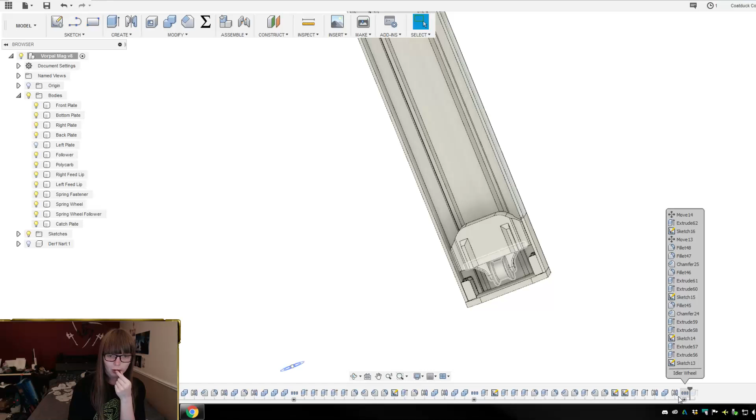Basically, I printed off the idler wheel holding, and another pusher. And for some reason that I honestly don't know if I could explain to you, despite having identical G-code, the follower didn't work. It just printed wrong, and I couldn't tell you why. Again, I didn't change anything, it was even the same G-code, the same file on the unchanged, the exact same file that printed the follower that's in the working one, which is now sent off. It didn't work for this one.

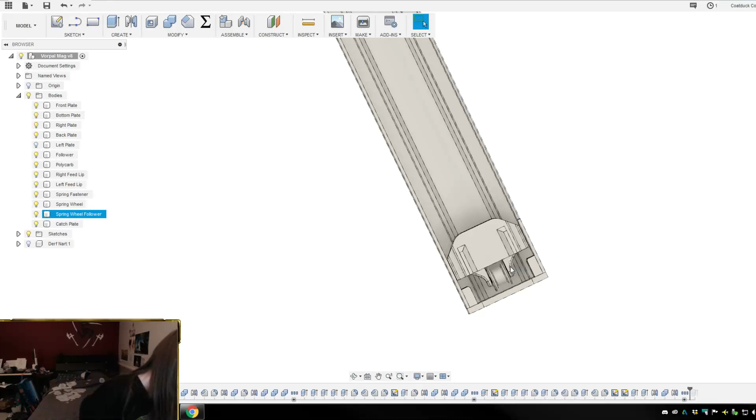Now, I don't know where the part has gone, but it did break. But this bit right here, I think I called that the spring wheel follower, which doesn't want to isolate for some reason. My computer is not happy.

When you make the mags open source, I'm going to print off so many of them. Good, good, that's the point.

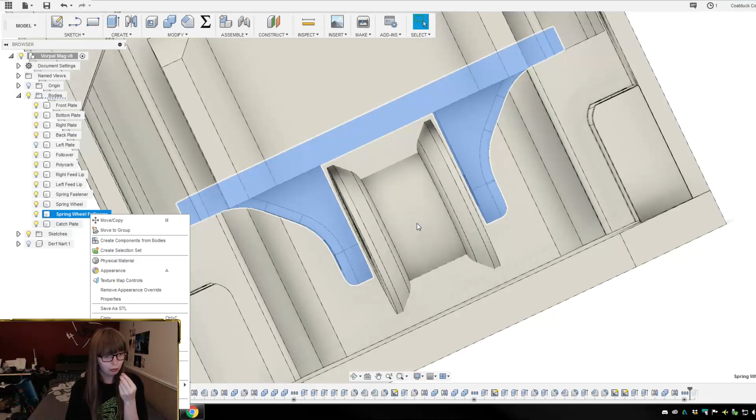Wow, this is really just not having it. There we go. So this bit, it printed off like trash, and I think I might have put it in the trash, I can't find it now. And it's because these are too tall and too thin. It's funny now - they printed off to about here, fine, and then when they got taller, they kind of fucked up.

Oh, I thought you meant same as in being trash. Yeah, there's tons of adapters out there.

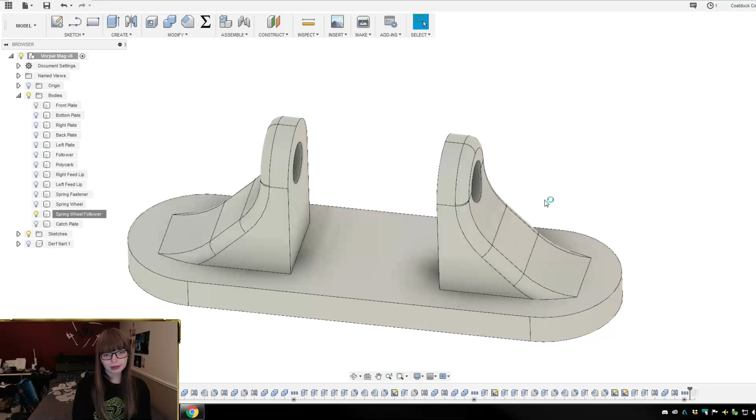So, I'm actually excited to see if and when Worker releases their version of these half-length mags. I am, however, a little concerned because the reason I wanted to do this was because I knew Worker was going to do this - I mean, it didn't take a genius to figure out that Worker was going to make their own version eventually.

But the reason I wanted to do this was so that if the community made their version and it was the same as Jet's version, then it would tell Worker what we wanted, right? Like, it would tell Worker, hey, we want this, we want compatibility and cross-compatibility between platforms so that we can have one ecosystem, not you pick Worker or you pick Jet, right?

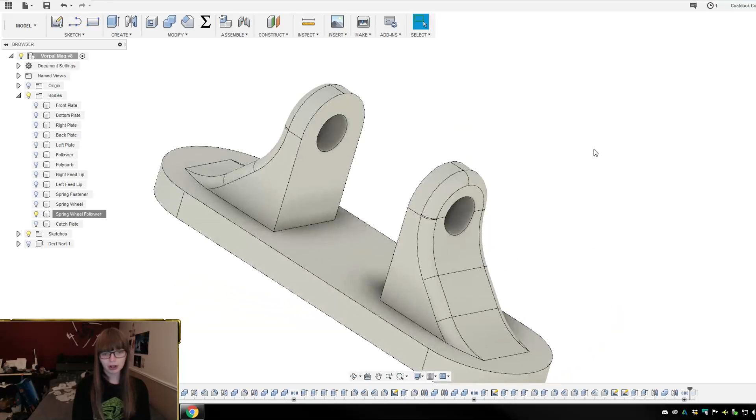No, that's not true, both of those statements are not true. Worker is working on a version of Katana's or half-length mags. And katanas do not have a patent on them. Katanas do not qualify for any patents - there's nothing about a katana that is patent-worthy. And if there was anything about a katana that was patent-worthy, it would already be patented by Hasbro, which would mean that they couldn't have done it.

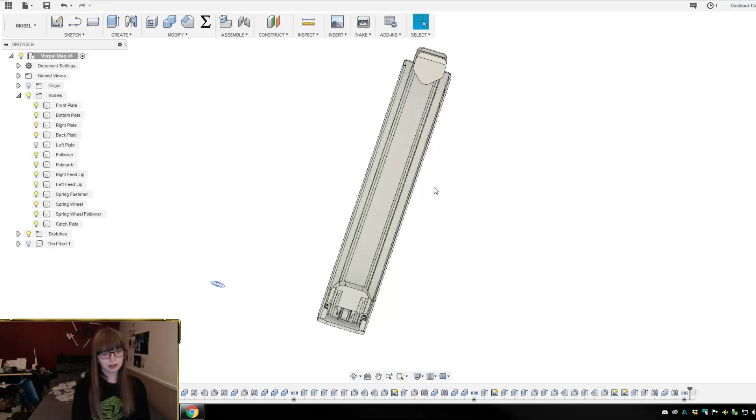So here, let me unisolate. Sorry, I'm just focusing on one piece right now. So this - it's got the side missing right now, but this is a half-length magazine that is compatible with katanas, and going to be open source as soon as I can get a system where this idler wheel actually is idle.

Because I've had issues with - I don't know if you can see that, you should be able to. So here is the idler wheel mounted in with the spring attached. I'm having a bitch of a time showing you guys, but there it is.

So as it is right now, it does actually work. Straight up, right now, I could glue this together and it would work, but it doesn't work very well - it kind of does that. And now, part of that is just the fact that this print didn't go right, which is fine, because we can reprint that, it's not a big problem.

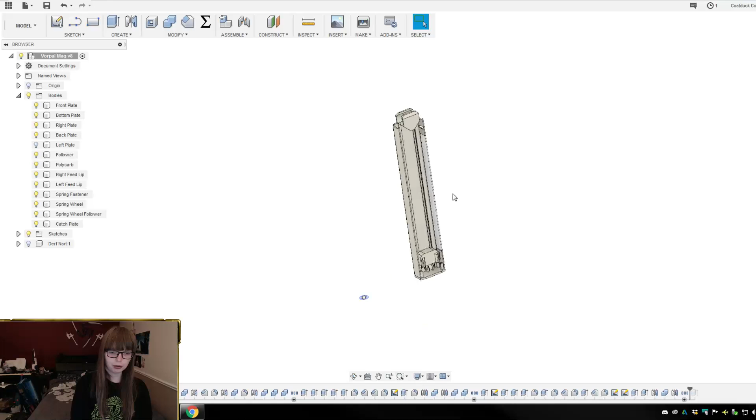But the other thing is, it's literally just this surface here grinding on this, and we can essentially create a bearing surface by using a nail through here. So if you trim down a nail and then shove it through a follower piece like this, then it actually works really well. I haven't tested it with a nail specifically - I'm going to be looking into finishing nails, like nails that are nice and shiny and smooth, and I'll find exactly what nails work best and then design it for that.

But for the time being, I had a - okay, well, we're going to use an Allen key because it's science. So this is not actually perfectly smooth, but it's already a marked improvement - like it's... oh, I fucked it. You gotta run it parallel, which is fine, because the constraints of the mag will ensure that happens, but when I'm running it like an idiot, it doesn't.

But, yeah, there we go. So, even on a hexagonal surface of the Allen key, it's still running really smooth. So that's what we're looking for.

So I have to redesign this bottom follower piece so that it runs smoothly.

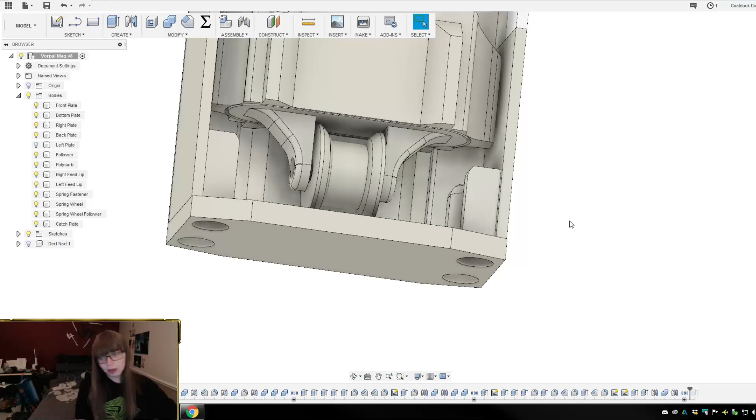Now the other thing is, this piece here, this side panel, which is not gonna be visible to anybody.

So let's take off the front plate and we can see this better. Actually, we can just isolate this section.

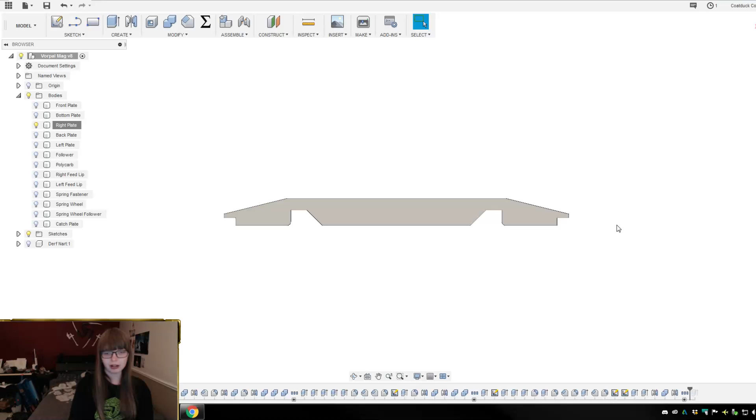The profile, this is the wrong way around, but let's spin it. So the profile here is like this, and it's printed with this bottom section being on the bed. And now I was always concerned about how this was going to turn out, because I think this is 0.5 mil thick in that area, which is really thin, all things considered.

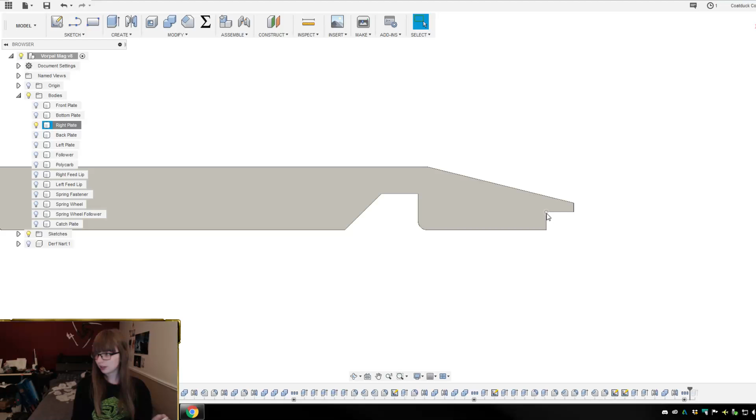I wondered if my new printers could handle it. With this project, I wanted to test my printers, not necessarily design things so that they're difficult to print, but have the early versions be basically testing what my new printers could do. And while they can do this, they can't do it reliably, which is the important part here.

So at some point, which might be now actually, we are going to add a manually generated support here. Actually, we can do it right now. It doesn't really matter.

Oh, actually, that's the wrong one. I don't know why I keep doing that lately. Okay, why does it do that?

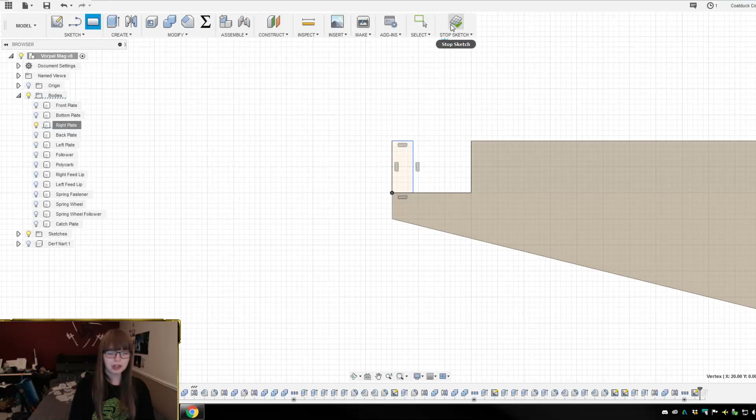I just don't know. Okay, so that's 1 millimeter tall, and we want it 0.4 millimeters thick, because we would want it just 1 layer thick. Let's just manually type in 0.4.

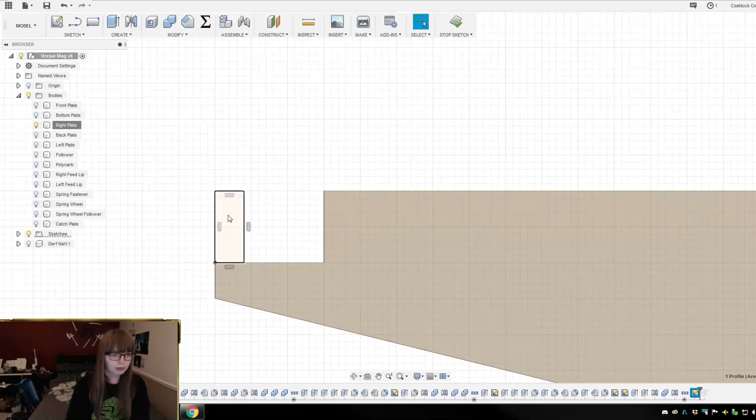Now we have to figure out how long this magazine is. Holy shit. Okay, so the length of this magazine is not as straightforward as it may seem, because it's based on a set of parameters. So we have to figure out...

So this is a 15 dart magazine. So we want to extrude this. Okay, so how long is this to start with?

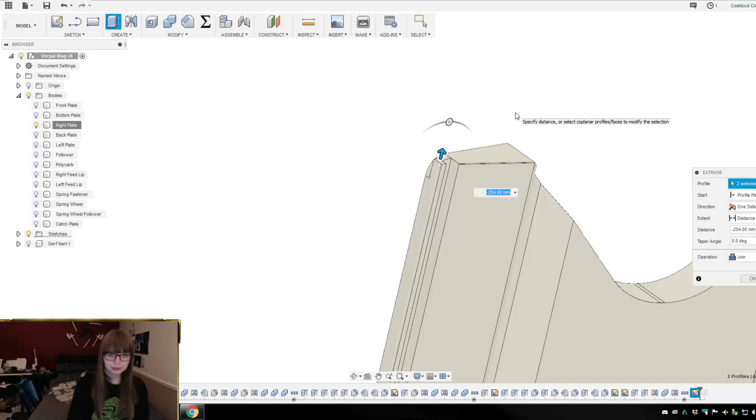Oh, hello, got a new computer. It's not true, I need to upgrade this computer.

So we could just leave it here, but then the problem is as soon as we edit these parameters, it's gonna fuck up, I think. Actually, it might not, because I selected that instead of... let's just double check. I'm pretty convinced it's gonna screw up, but let's give it a shot just in case.

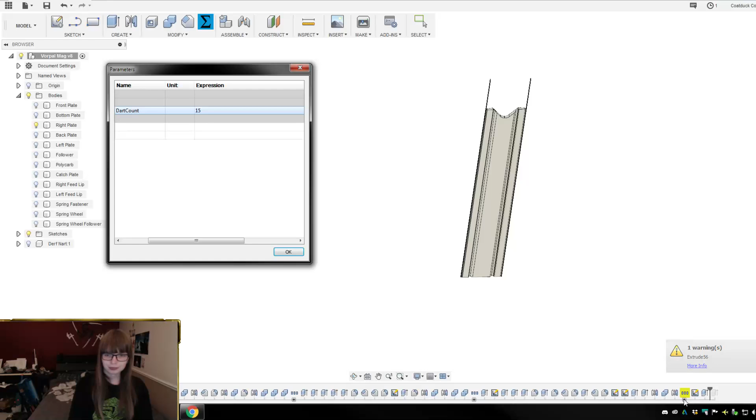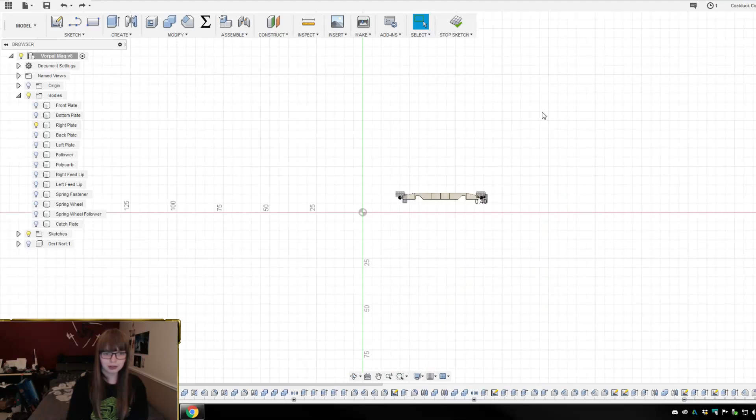Oh yeah, I'm confused as to what happened here, but we're gonna burn that bridge when we come to it. So let's Control-Z out of that, and then we're gonna get rid of that as well.

So yeah, we have to figure out the total length from the bottom to the top. And actually, I think the front plate, if we bring this back in, I think if I look at this... no, I've got no fucking idea.

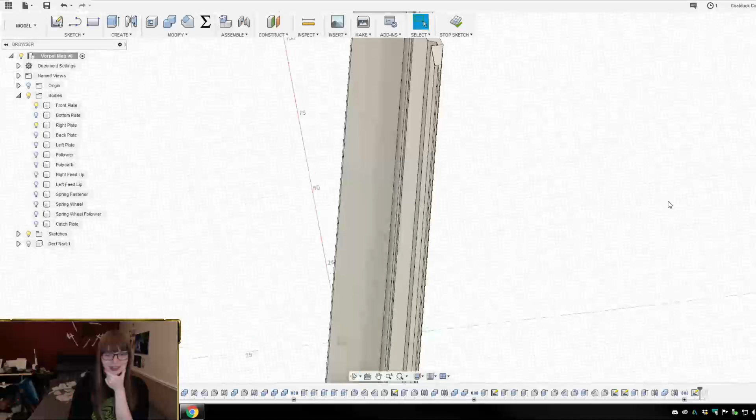Catherine, don't say shit like that. He might. I want to say I'm kidding. I don't know if I am, I think I'm kidding. Panda, we all love and appreciate you, a whole lot.

Okay, so let's figure this out.

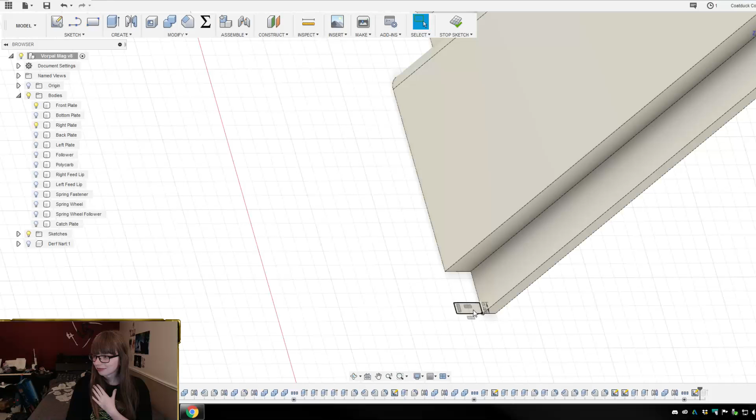Hey, Mustachio, Pistachio. I wouldn't either. God, no, God, of course I wouldn't.

Okay, let's just... okay, so, what is this, 13 times... okay, so each, I need a calculator, because I can't do the math, just because I need to keep track of the fucking numbers. Okay, so 13 is the height of a dart.

Then we want to subtract 4 from that, or 3 from that. Subtract 3. Equals... oh god, I don't remember this equation.

Could one make a 50 dart straight mag? 30 is going to be really pushing it, but I'm gonna try. So the limiting factor here is actually the length of the drum spring that I'm using for the drum spring version. That's the limiting factor. I think I can manage 30, it's going to be really close, it's going to be like 29 or 30.

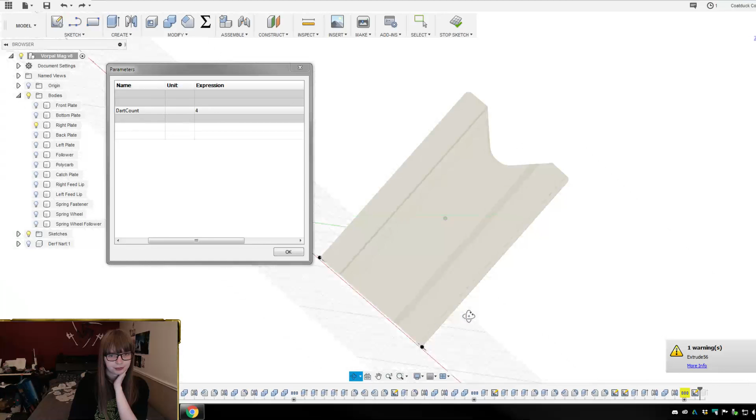Okay, this is really bothering me. I don't know what's happening, and I can't figure out what's causing it. I'm a little concerned here. I'm concerned, I'm very concerned. What's happening here?

Why? What am I... oh, this is not good news for me.

Are these features suppressed? I could not tell you.

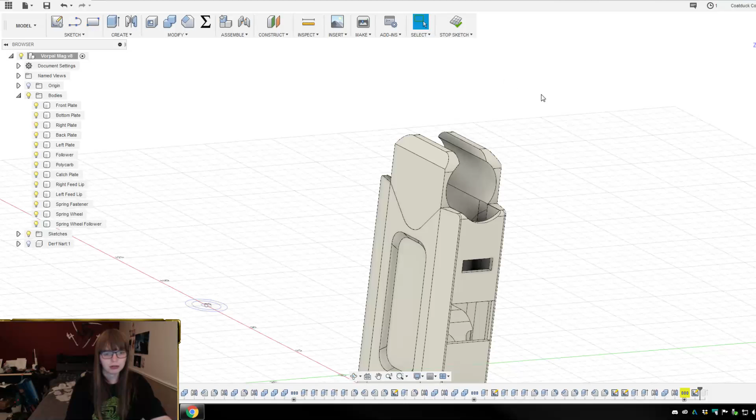Why can I not roll? It's just really not letting me roll. Oh, okay, because I'm currently in a sketch, for some unknown reason. Oh, I was still in that sketch. Alright.

So let's take it down to its minimum capacity again.

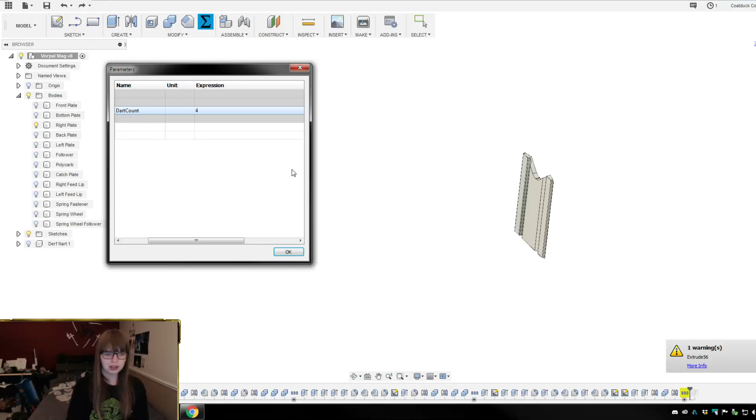Yeah, some people are suggesting that you could do it if you used a normal mag spring. Good luck, I think a constant force spring is going to be the only way to go here. Yeah, unless somebody starts selling a longer drum spring, I find this fairly unlikely.

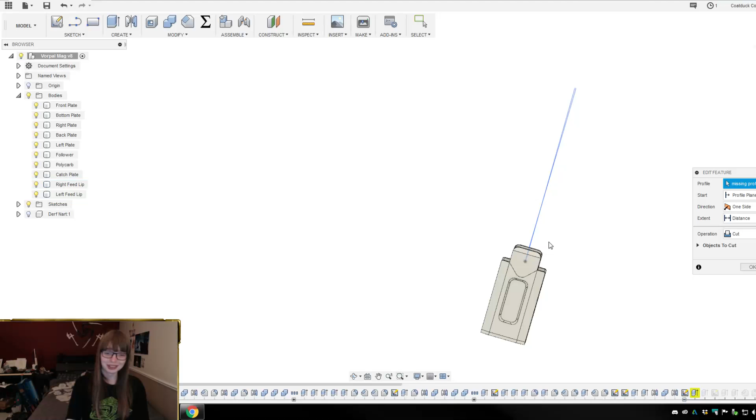Okay, so why is this happening? Let's start there. Oh, that's a clusterfuck. Oh, that's not good. Take out the left plate too. What the fuck is that? What has happened?

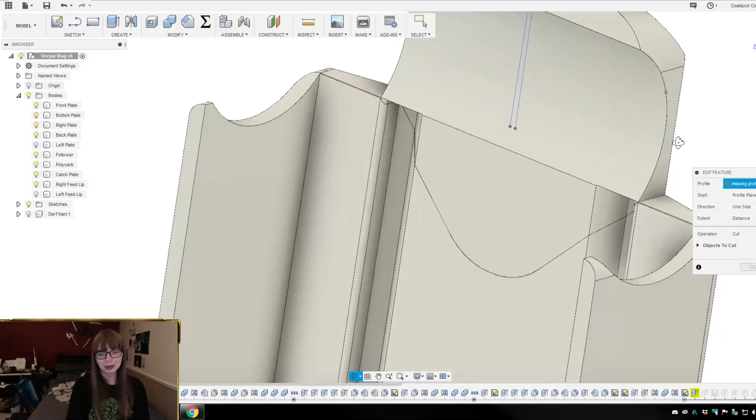Ugh, piss off. I genuinely don't know what has happened here. I might just say fuck it and not worry about it, because technically this feature doesn't actually have to be parametric, because all this is making a usable feed lip here. It's not super professional, but it also doesn't matter.

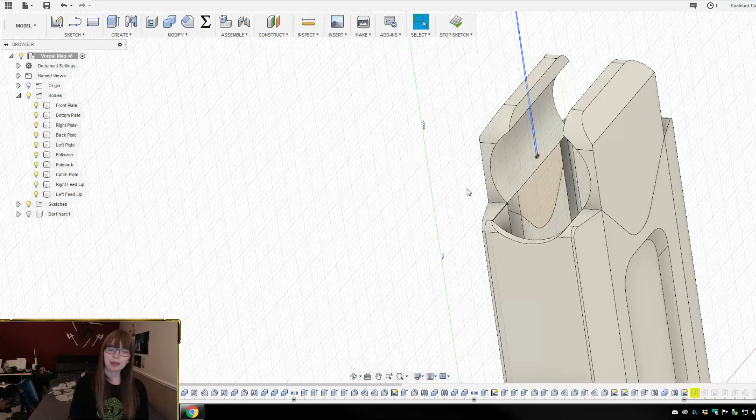So this was a sketch, and part of it got anchored to a point in space rather than a point on the mag, which is kind of shitty, but I can't really think of anything I could do about it. So I think we're just gonna say screw it, and we can just straight up not worry about this, like it doesn't actually matter.

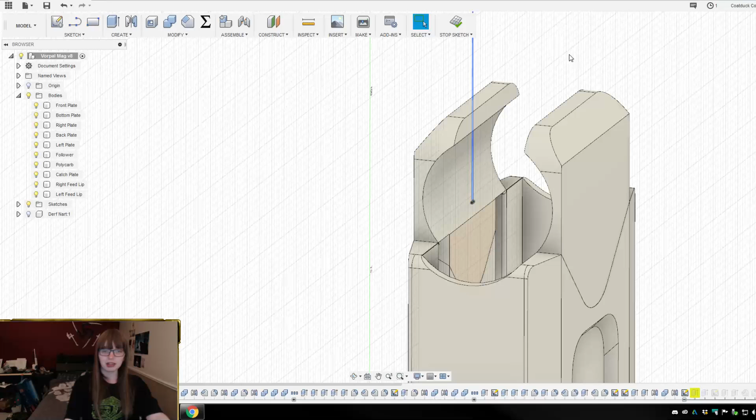Again, this is only done to create a feed lip that... oh, that's weird. Oh, something bad is happening here. Oh, that's not ideal. Okay, so we're just gonna ignore that problem forever.

I just knocked something off the desk. I don't know what it was.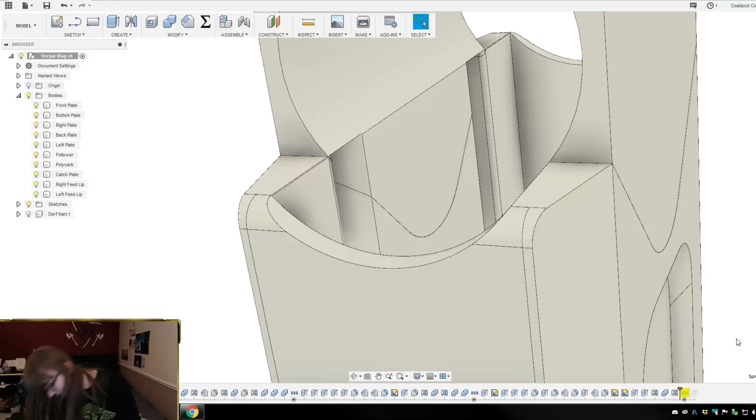Is it gonna be open source? Wouldn't that kind of make it worse, assuming people mess with them? Yeah, it really would.

But the problem is, I don't know how to fix it without having to redo almost everything. Like, that should have worked and not caused me problems, but it didn't.

Okay, back to the original thing that we were talking about, which I don't fucking remember. This has been a subpar experience altogether.

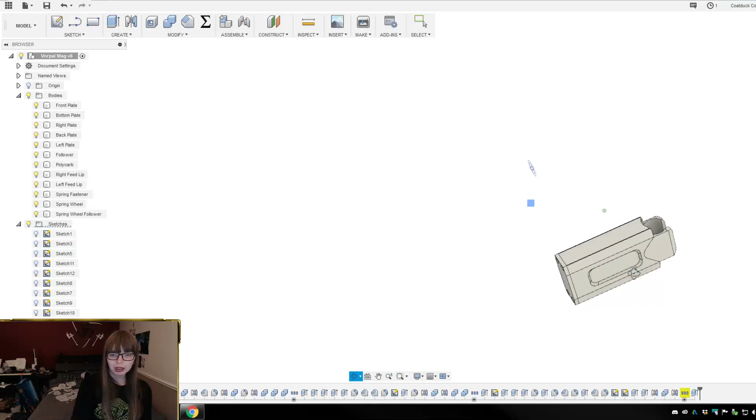16 is the most recent sketch, and it's... oh, fuck you. Fuck knows what's happening here.

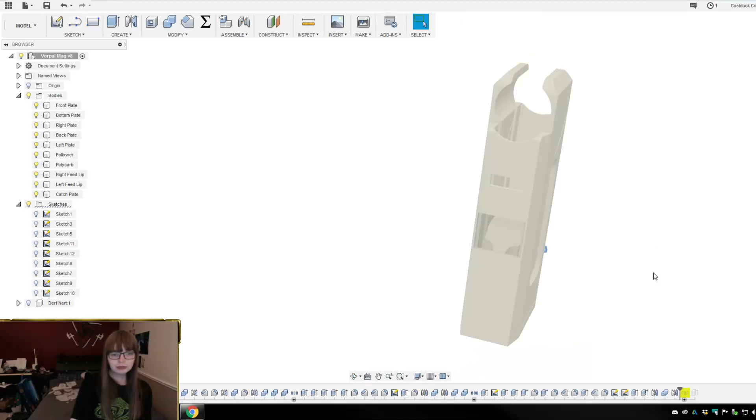Damn it, Catherine. Hey, they're what I have on hand. I'm not gonna bitch.

Okay, so did I just randomly lose a sketch somewhere? I don't really know what happened, but that's fine, it didn't exactly take me a long time to work out.

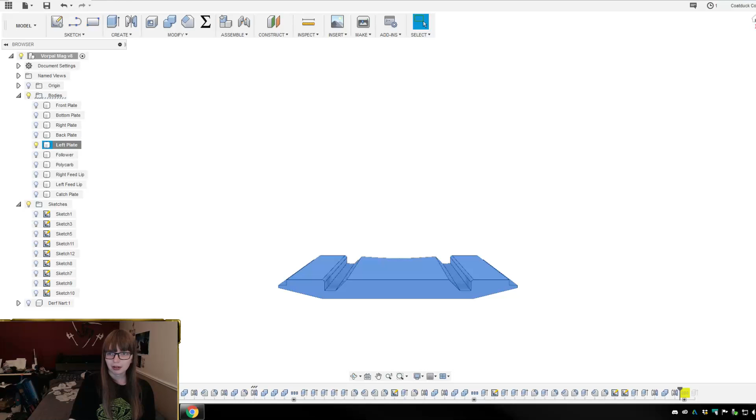Okay, so I think we take a bottom view here, Catherine. That should, for all intents and purposes, be...

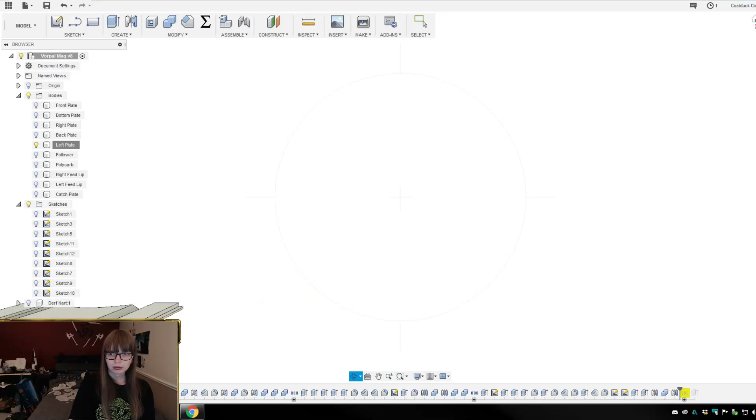That's really odd. That should be orthographic, I don't know why it's not doing that for me. Alright, well, we're just gonna power through that, because nothing bad will ever happen if you just pretend you don't have problems, right, guys?

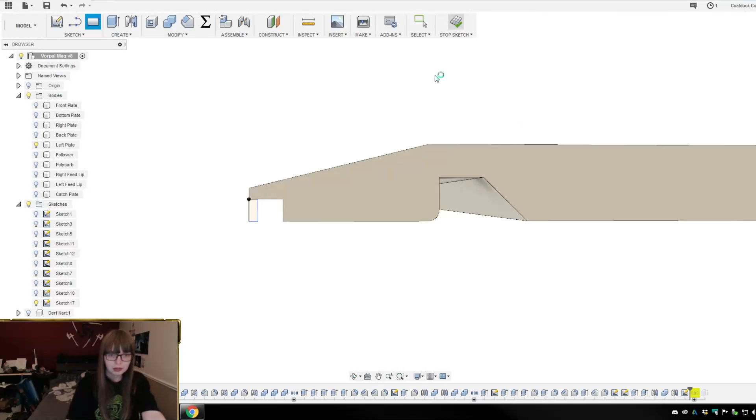Alright. What the hell? What the hell is happening? What has happened with my camera? Something terrible, that's for sure. My entire movement system is off, it's like it's focused in some other fucking dimension.

Okay, so this is 72 millimeters. We need to then subtract 13, and I know I could do this in my head, but it's more embarrassing.

Oh no, oh, has something gone terribly wrong? No, okay, we're just gonna power through that. Okay, so it's more embarrassing to get something simple wrong and redo a day worth of work than it is to pull out a calculator for something that should be way too simple.

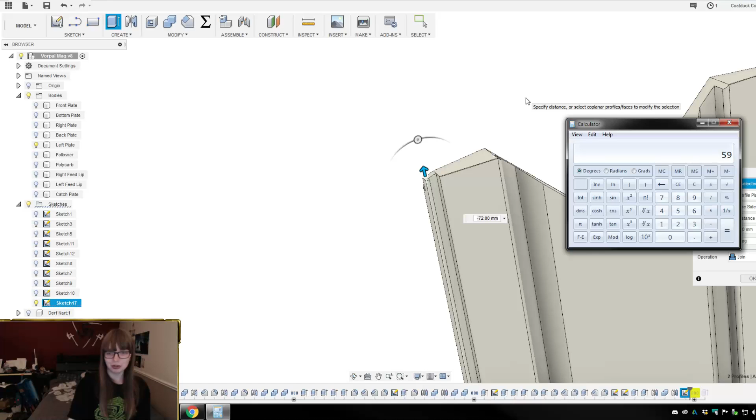Okay, so this equation is minus 59... 59 millimeters... think... then we want to add... 59, no. This is a little bit obnoxious because it's giving me a negative, but okay. Can I? Nope, okay, worth a shot.

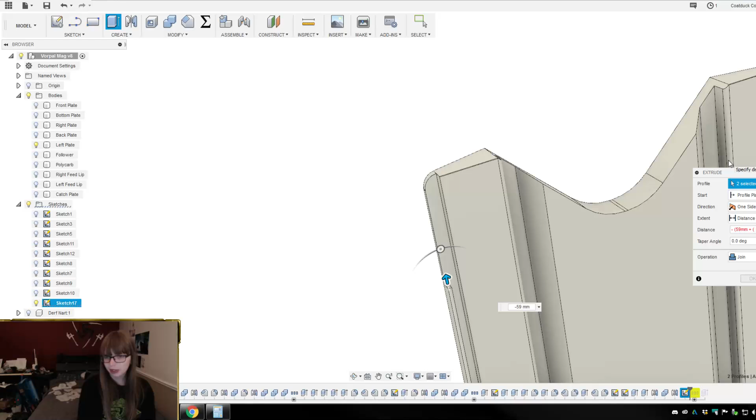Okay, so I have to throw these in brackets. Minus 59 millimeters times... no, that's plus... 13 to the... multiplied by dart count. Okay, so 13... okay, so dart count minus 3. I actually think that's right, assuming I've gotten the correct number of brackets there, which I definitely don't.

And I think that worked out. I'm thinking that worked out. Let's go back up to 18, see what happens. And that worked. That's fine.

Meow. I don't know which meow, there's a lot of meows that watch my...

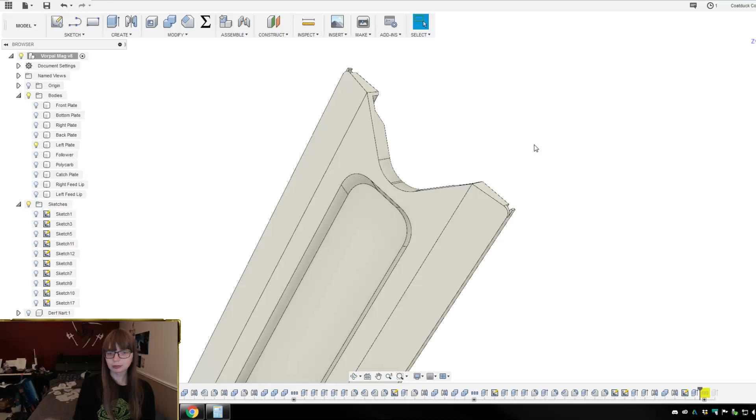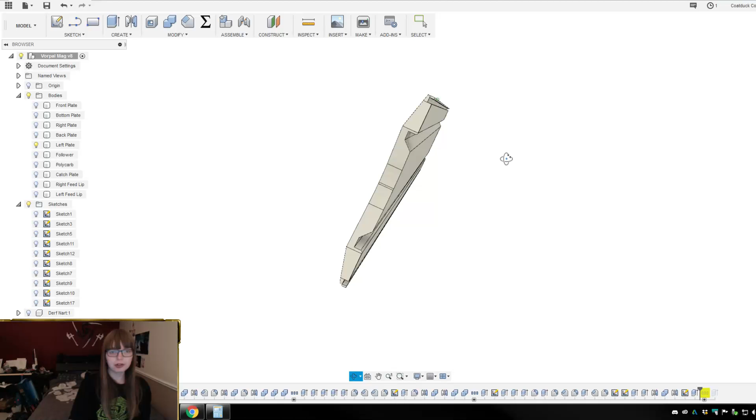So that should theoretically enable it to be parametric. If we go out to 30, we should still have that manually generated support in there, which is what I was looking for. And if we go down to 4... yeah. Just out of curiosity - nope, still warped. Tried it. Yep, okay, so this side has the manually generated support on it.

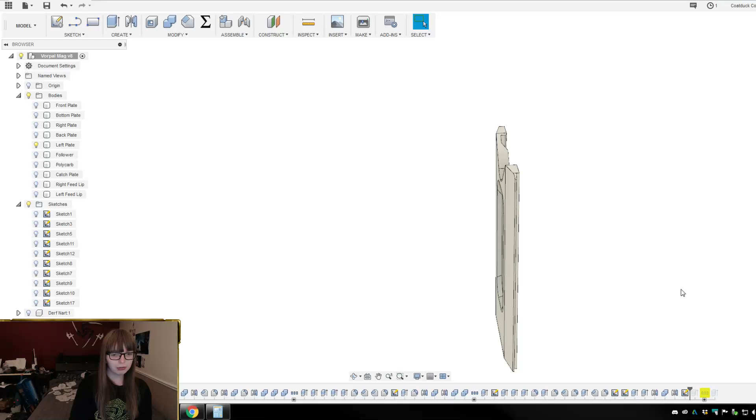I'm not in the Fuzzy Walrus Discord. I'm not in a lot of Discords, if I'm being totally honest. I think I'm in my Nerf Discord, and the Brit Nerf one. I don't like dealing with people, if I'm being totally honest.

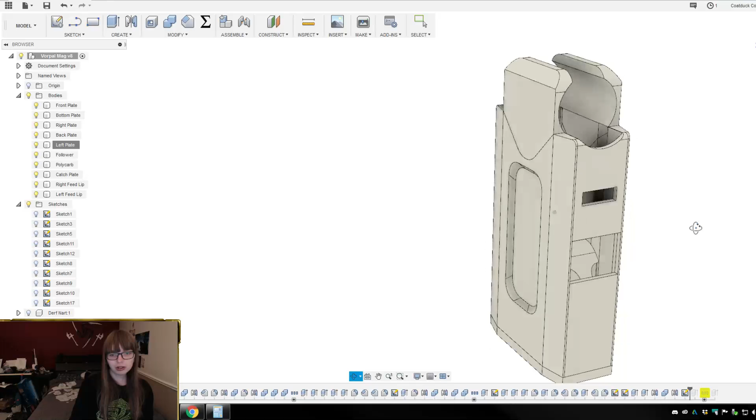Okay, so let's bring back our Nerf darts. So there's a 4 round, and then let's take this back out to 18. Alrighty. So there you have it. Now this has support for manual support. I think that's this - yeah, okay. Cool.

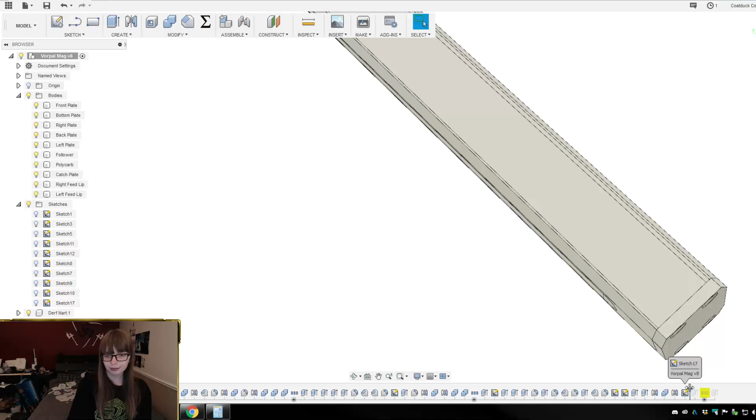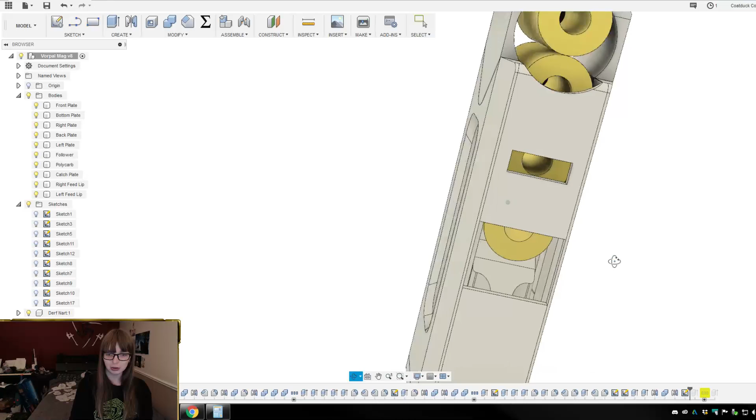Make a 1 dart, please. I can't, actually, because of how this whole system works. I mean, okay, here, let me show you. So if we bring this back down to 4, which is the absolute minimum, so if I really, really wanted to, I could probably make it 3 by knocking out this section here, but I'd have to redo how all of the technical work behind how this is parametric works.

I really thought about a 1 dart, just being able to make it small enough to do 1 single dart. But the truth is, if you wanted a 1 dart magazine, you could print it in effectively 1 piece. You might want to do multiple pieces, but the follower can be straight up fused - I'm pretty sure you could make the follower just fused in there. You might have issues if you're using it in a springer that's got a sealed breech system, then that might cause you trouble. But there's only so small you can make it, in order to have a proper locking latch and stuff.

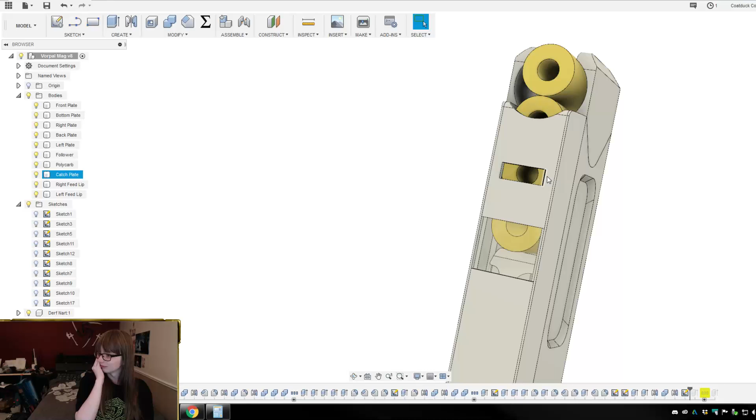I'm buying a 3D printer to only make a 1 dart mag. You go right ahead, I will laugh quite a bit. That's funny. Yes, no, I'm probably gonna make myself, probably just to be obnoxious, like a 7 or something, or maybe a 6. Maybe a 6. Just like for pistols and stuff.

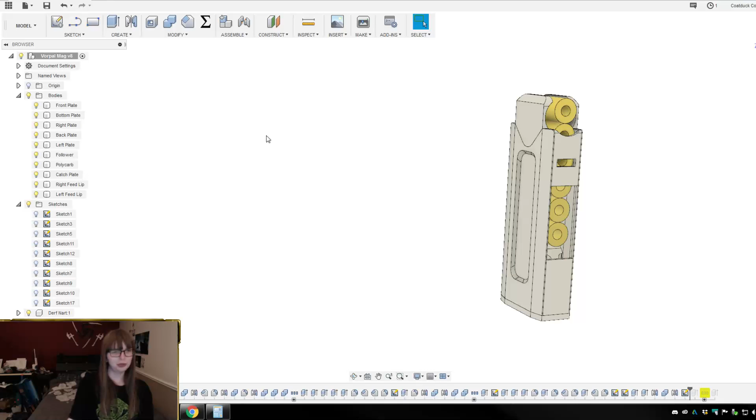Now I've been talking with Mr. Heathpants, and we're talking about making a mag specifically for the Desert Pigeon, which is ridiculous. And so that's gonna be a relatively small number as well, so it's probably gonna be like 8-ish. Which would look, I don't know, maybe I'll go with 8. Something nice and compact for a pistol. Yeah, like that looks like it's about pigeon-sized, which I recognize as a weird unit of measure, but here we are.

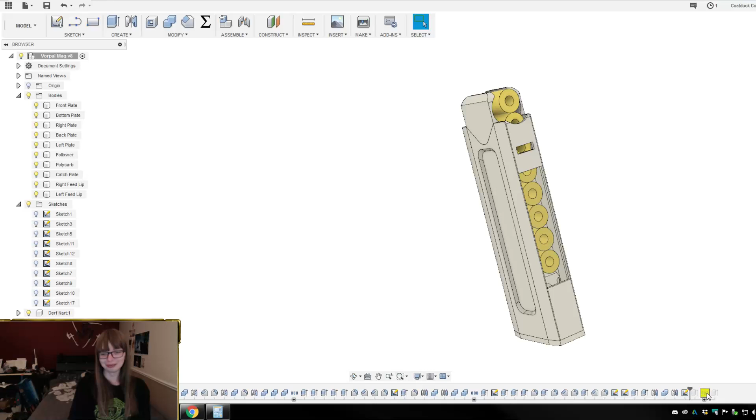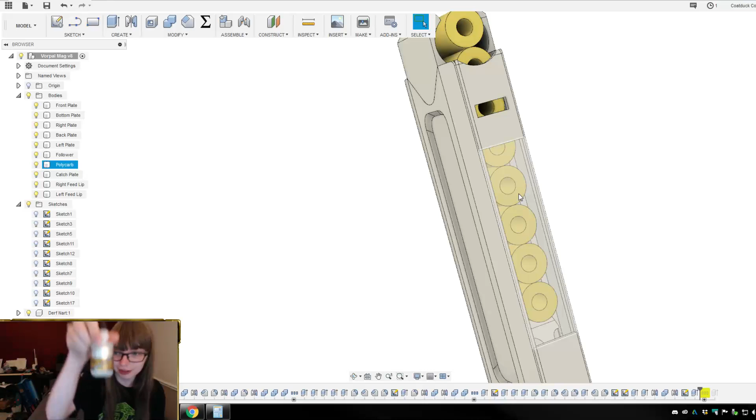So then the other good news I have is I went to the hobby shop and talked to them about odorless CA glue. If you're getting this kind of brand - I rant about this all the time - this brand actually has no name brand on it, and they come with a sticker right here. When they send these out to their distributor, the distributor puts a different sticker on it. So you can get this exact same kind of glue with another sticker on top that says whatever your local hobby shop is, or whatever the distributor that your hobby shop buys from is. It's always different depending on what region you're in, depending on a dozen different things, but it's still the same brand, and I have no idea what the brand is, because they have absolutely no branding except for the sticker that goes on here. And again, you can literally just peel that sticker off and you end up with this. Seriously, if you have this kind of glue, go try it, because it's funny.

Yeah, the odorless stuff actually doesn't fog up polycarbonate. So I intentionally made the biggest blobs possible here. Is it gonna focus, you... Nope. Okay, there we go. So this one up here, right in the middle, you can see it does a little bit of a fog effect where it never cured properly, because it was just so thick of a bunch of glue. But right down here, you can see that it curdled up.

Let's see if I can get this a little closer. Nope. Come on, focus. Come on. No, okay, well, we're going here then. You can see this curdled up all nasty, and then it kind of fogged up the polycarb - like it literally fogged upwards on the polycarb and made it all nasty. So I found a kind of glue that I can glue this polycarb in with, which means that I can progress on...

I fucking lost it. I actually fucking lost the magazine. Oh, here's part of it.

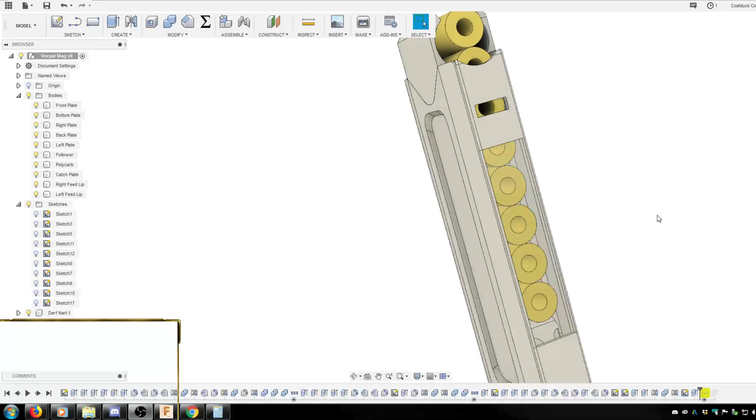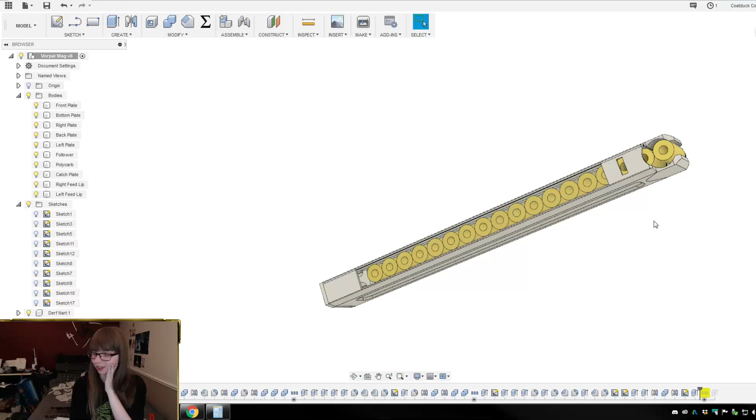So let's bring this back out to 18 darts. I'm so proud of the fact that it's so stupid and it was so easy, but I'm so proud that the darts will scale out as well as the rest of the mag. That's pretty rad.

Okay, so it's the left side. So let's just isolate this.

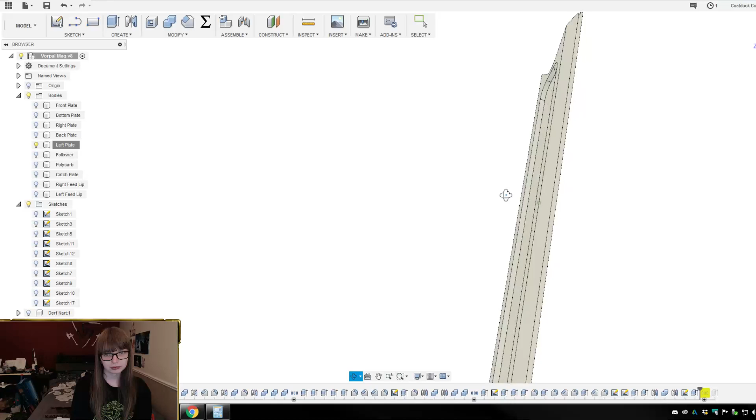Alright, we're gonna replace the left plate. So I'm gonna try printing that out and just see what happens.

It sounded bad, you should go to a doctor. I'm fine, everything's fine.

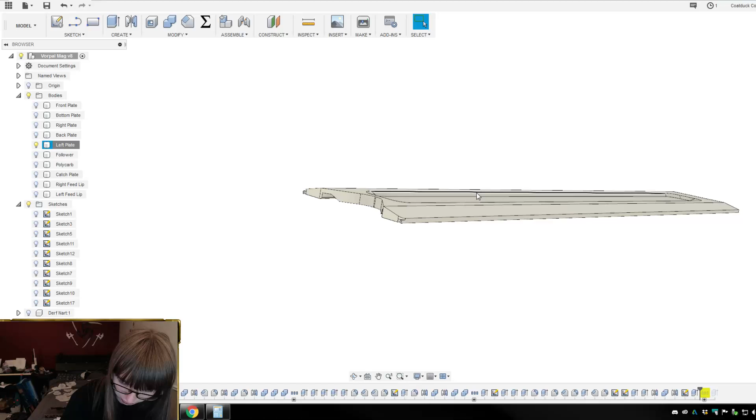Let's just suppress this feature and then unisolate.

Sorry, I thought I answered this earlier. Maybe you missed it, maybe I missed you. I don't know, I don't have a good explanation.

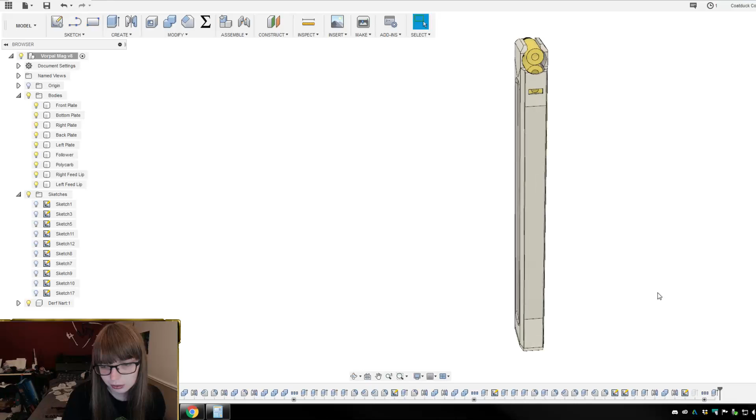Here is the... wait, hold on, if I get rid of the polycarb, there you go. So there's the version that doesn't have the polycarb, because people often cannot find polycarb. So, whatever.

Alice's porn folder, I gotta see this. I can't in good faith talk about that on the stream, there are children that watch this stream. I shouldn't even have made the comment in the first place.

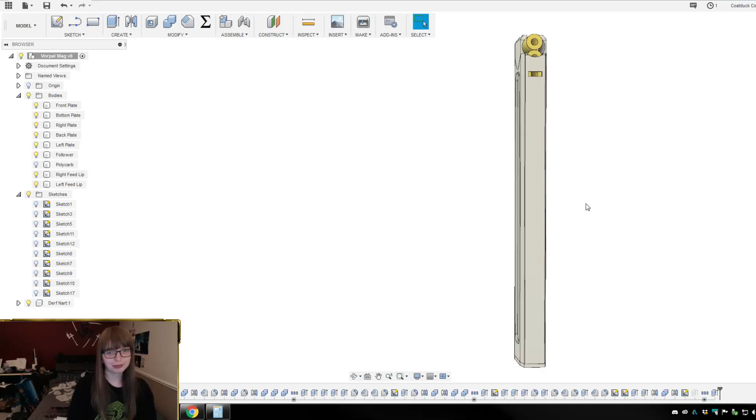I buggered it, I screwed it right up. That's fine, there could be worse things. Nope, back plate. So if I isolate that... oh okay, that did work. Okay, I lied to you.

Yeah, so there is a version that works without the polycarbonate, and you can still screw with your parameters here and, you know, like...

That was exciting. Yeah, so you can still screw with the parameters.

Everything's all good. The first one I printed out, I actually printed out without polycarbonate. I really should have tested this one without polycarbonate because it's a huge pain in the ass. Truthfully, to cut the polycarbonate to shape is a pain in the ass, and it's worth it if these are mags you're going to be using for the next 5 years. But if you're just doing this for testing and you don't expect this to work, it's just a pain in the ass. Try and render a 50,000 dart mag just for the fun of it.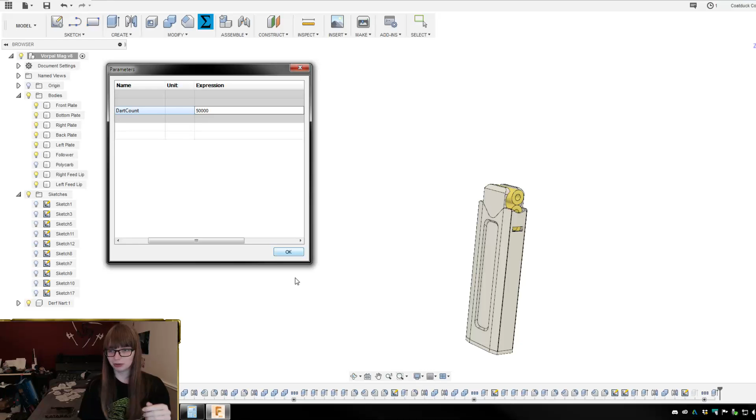So I actually did, I think, 50,000 earlier. I'll do it, but hopefully Fusion doesn't crash. The thing is, when you get out to like 50,000, it's just a line on the screen. Like, it doesn't...

Is there a spring for the follower? Yes, so it's designed to run on 2 different kinds of springs. Well, you may have crashed Fusion.

Yeah, so there's 2 different designs for the follower for the mag. So you can go with a drum spring like in this one, or you can steal the spring out of some other magazine. I stole one out of a katana.

Press F 360 times to pay respect. Yeah, we're gonna try and fix that. Oh yep, that crashed. Okay, so hopefully that auto-saved.

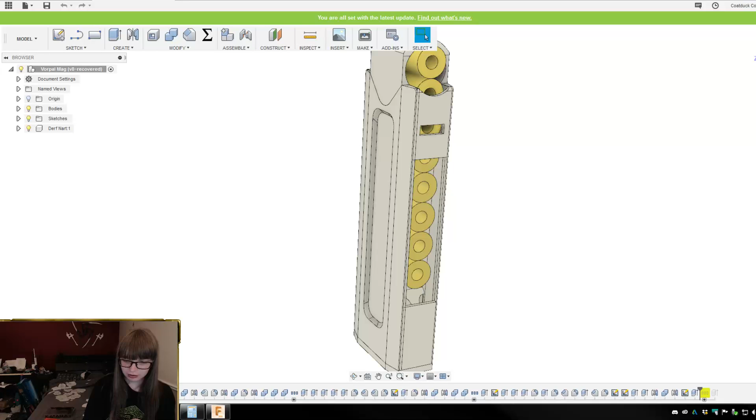So okay, so we're back to where we were before. And I've got this pre-generated support material in this. Alright, let's break it again. Yep.

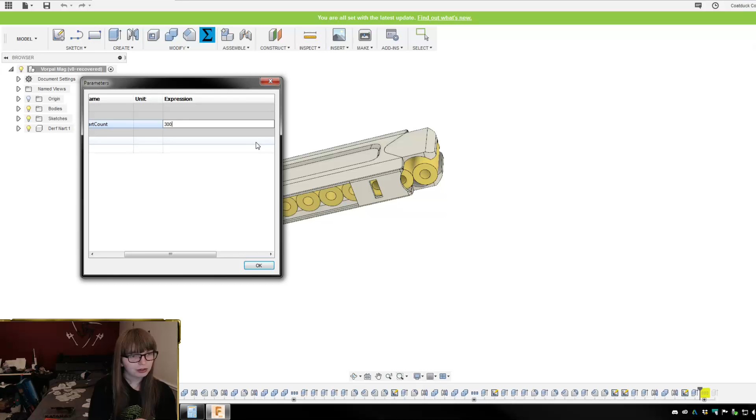Let's go to like 300. I think, actually, I'm gonna... Hey, is that gonna work?

Yeah, so Cartaya just sent me a picture of his modified Pac-D mags that are half-length mags. So, with all due respect, suck it, nerds. Thanks, Cartaya. Thanks for stopping by.

Did I break this again? I will be so embarrassed if I broke this again. So the files aren't available yet because they're not done yet. God, I'm gonna be so embarrassed right now.

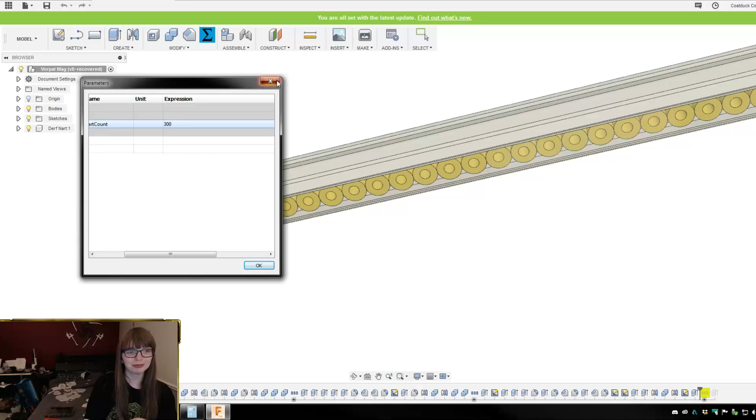Oh, hey, it's an updated graphic. There it is. Ladies and gentlemen, I give you the 300 dart Vorpal mag.

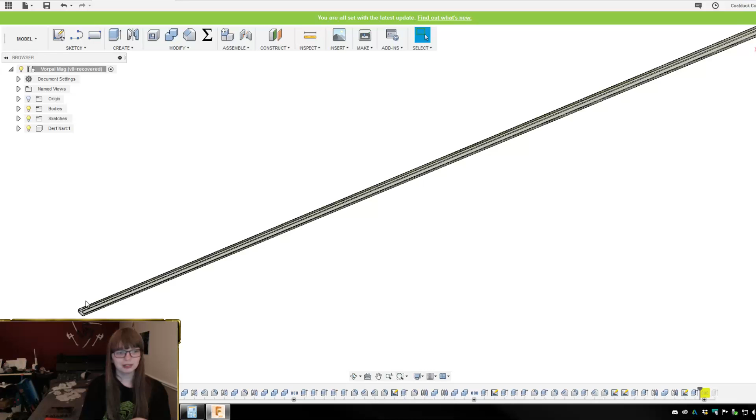There you go. That is with it as... Okay, I guess I could bring it at a slight angle. Okay. Let's tilt this 45, or whatever 16:9 ratio is.

Actually, less than that because my screen isn't that, it's not actually using the full side of the screen. There you go. That's a 300 dart Vorpal mag, as big as it'll go on the screen, and you see why going up to 50,000 would just make it that fucking line.

So actually I think the issue here is that I'm rendering all of the Nerf darts, and that's what's causing the issue. So I think that if we go 500, watch me crash it. Watch me just completely make myself a liar and crash it.

Actually, how manageable would a 50 round mag be? It doesn't matter. Realistically it doesn't matter how manageable it is because... remember earlier when I spent like 5 minutes looking for that piece? It's right the fuck here. Just right here. And actually, I had such bad issues on this that it snapped. It's not crashed, to my credit.

So yeah, the problem here is each dart is about 13 millimeters approximately. Now I'm giving that a bit of tolerance because it's always good to give things tolerance. But this is a 38 centimeter ruler, and if I go all the way to the full length of it, yeah, that's the end of it.

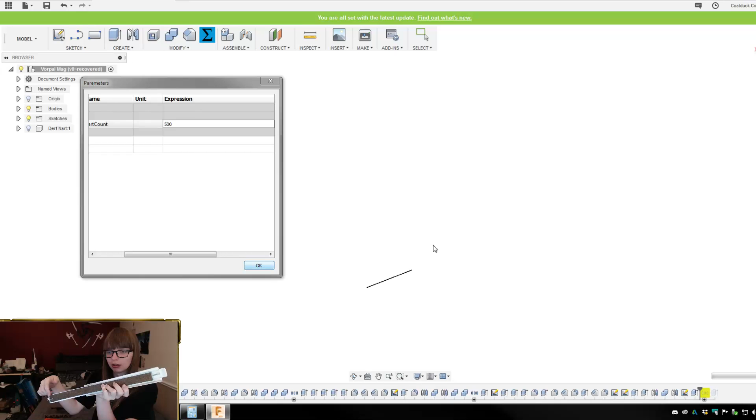So you can see the thing up here. From here to here is the full length of the spring. So unfortunately you can't make a 50 dart mag, not with these springs anyway.

I could look into people with bigger springs like this, but the problem is — and I've actually talked to Foam Blast about this when I asked them, I'm sure a million people have asked them this, so I'm not trying to take credit here — but when I actually asked Michelle if she could bring back her upgraded drum springs, I actually just tried to buy her backlog stock of like 15, because I wanted some.

And then she... I fucked it. Well, I'm gonna have fun rewinding that drum spring.

She eventually, after a bunch of people pestered her, ended up bringing back the drum springs. But I know for a fact that these are not a standard off-the-shelf part. These were custom made, and it's because nobody needs springs with this much force in this size. So the fact is, I don't know how plausible it would be to get more springs manufactured.

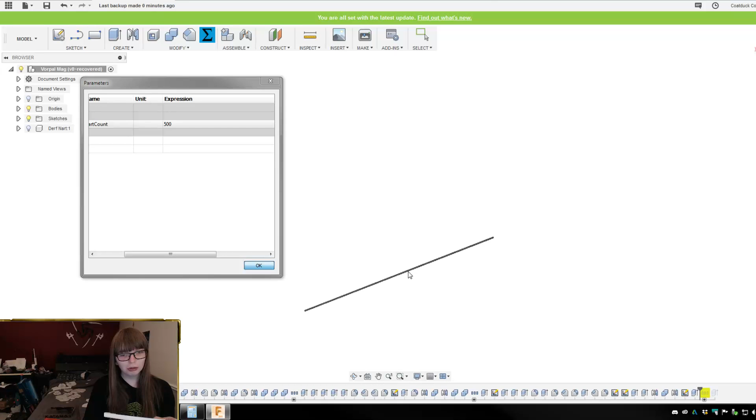Did this work? Oh my god, it did! Holy shit, it actually worked!

There you go, there's your 500 dart, there's your 500 dart Vorpal. So the largest one that I'll be making, or that is possible to make with current spring technology on the market.

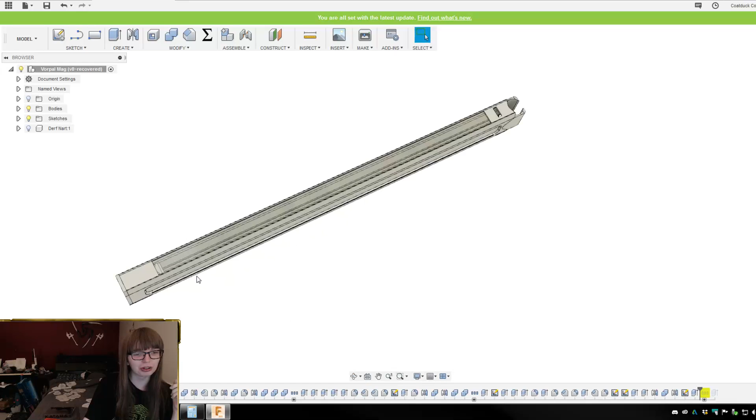I watched Luke's review where he said you can fit like, was it 275 or 375? I don't remember, just way more darts, or way more ammo than Hasbro claimed. I totally agree with his suggestion that it's designed to hold 275, but...

Hasbro didn't want to include another, I don't know how much that is. Rival balls from the store, I think they go for like 50 cents a ball or something. Again, I really don't give a shit about Rival, no offense to anybody that does, nothing against you specifically, I just don't like it. But yeah, they're like 50 cents a ball retail value, so if they included 275 rounds, that would be another...

That's being obnoxious. Like, something, wow, okay, I'm failing basic math here. I can do the complex shit. This be 12.5 plus 25, 37.5-ish? Yeah, there'd be another $37.50 that they would have to give you.

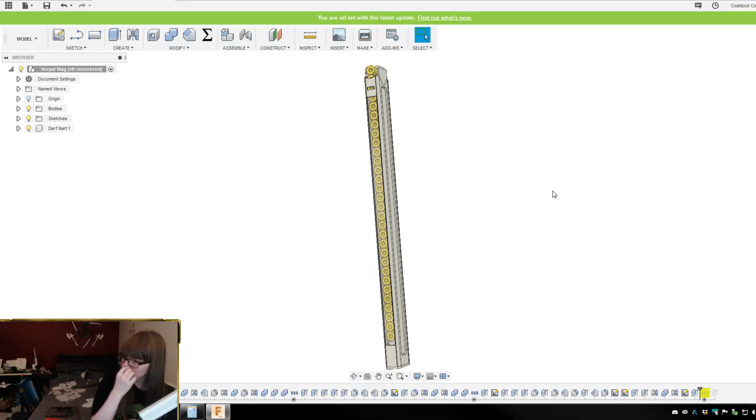Catherine's technically right, I do get all the balls I want. That number is 0. There you go.

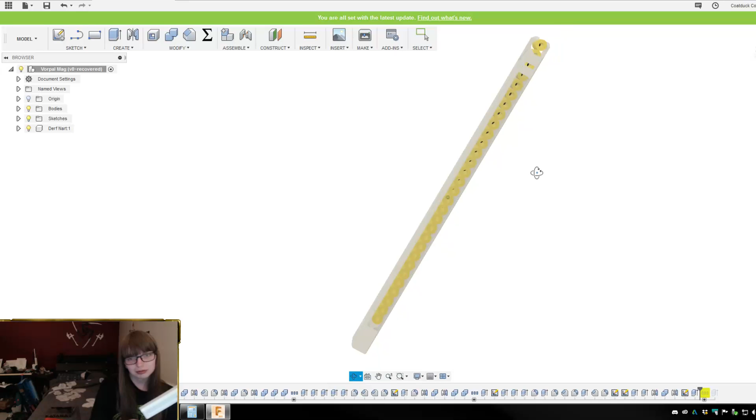Yes, so I'm going to make this mostly just to prove a point, just to say it can be done. It's stupid, it's impractical. So...

Oh, 3D print darts and fire those. You think you are fucking funny, kitten. That is just... God damn it. Okay, so...

I'm just trying to think of what else we could do. I'm gonna wait until I've got the nail pivots, and then I'll redesign this follower piece. But for now, I'm going to print out this updated side piece, and hopefully that will fix the problems I was having.